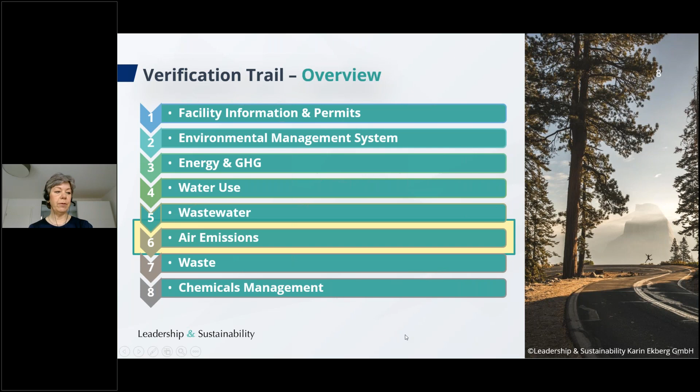And of course, this is about improving performance. We really would like to see that we all have a much smaller environmental footprint moving forward. And finally, these webinars also can help you to prepare for your verification if you are intending to go through a verification. And here is the overview of all sections in the Higg FEM. And you can see we have here the section number 6, air emissions, our topic for today.

Managing air emissions requires a different approach than managing energy, water, and waste. Air emissions are regulated to a set level, while the impact of energy, water, and waste can be continuously improved by reducing quantities. So we differentiate for different types of emissions, and this is important for the entire air emission section to know this differentiation. We have point source or stack emissions. Those are stationary identifiable sources of emissions that release pollutants into the atmosphere. Examples include emissions from boilers and other combustion facilities.

Then we have mobile emissions, emissions from equipment that moves from one location to another. Examples include motor vehicles and construction equipment. And finally, we have the non-point or fugitive emissions, emissions which do not pass through a stack, a chimney, a vent, or other functionally equivalent opening. Common sources of fugitive emissions include screen printing, foil printing, molding, etc. Fugitive emissions could also be the result of construction activities that generate dust or other emissions. These types of emissions are seldom included in the permitting process.

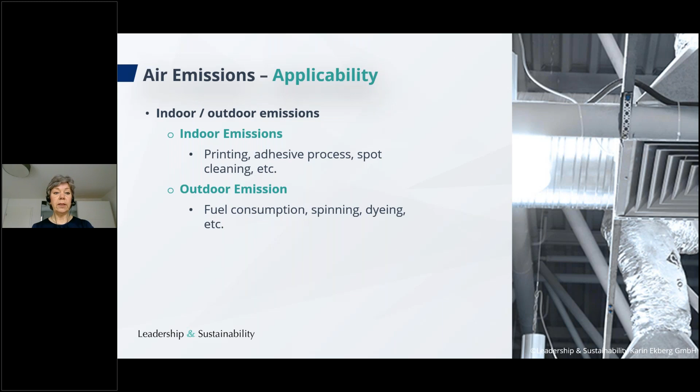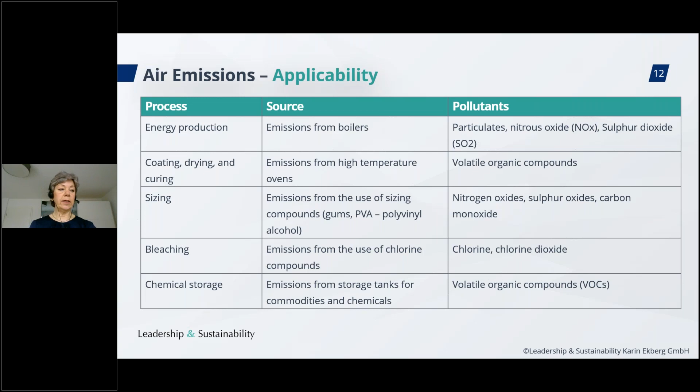And now I want to give you the overview of the different questions in the air emission section. And it looks like this. Oh, sorry. Like this. And so you can see again, at level 1 we have several questions. At level 2, we have only one question. And at level 3, also only one question. So in order to be able to move on to levels 2 and 3, you need to respond to all questions at level 1.

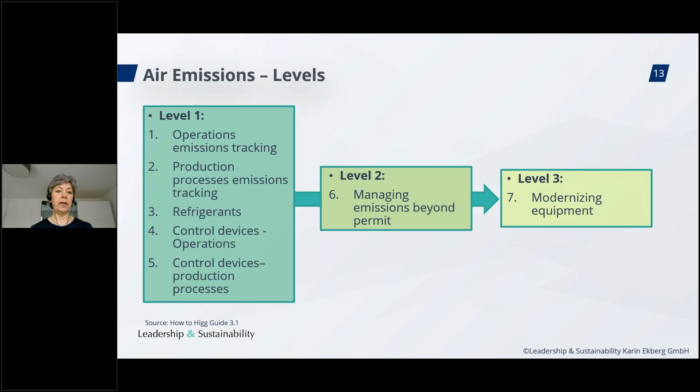And some of them, or all of them, may be included if you have the applicabilities that control all those questions, but depending on the type of air emissions that you have, you may only have a few of those questions at level 1. And let's go to the first question. So this is about the operations and production processes, the Q1 and Q2, the emission tracking.

And here, I just want to give you information about what changes have been made, because in the air emission section, actually quite a lot has changed. There have been difficulties in completing the air emission section previously, because it was very unclear what are operations emissions and what are production processes emissions. And now SAC has sought to differentiate this more clearly. So there are some updated questions. The questions to report all air emissions from operations and production processes have been revised.

And the reporting on quantity of the air emissions, remember you had to fill out how many grams or kilograms of specific pollutants you had been emitting. This question has been removed for now. It will probably be reinserted later again. But this year in the Higg FEM 2020, this question has been removed. And then there is also an updated table to include additional questions on the air pollutant and emission test reports for question 1 and question 2. So those are some updates.

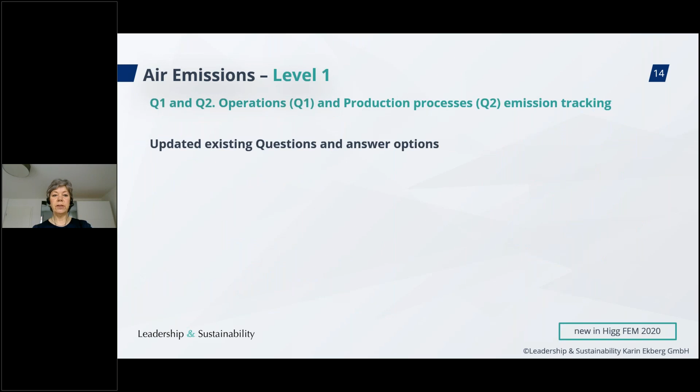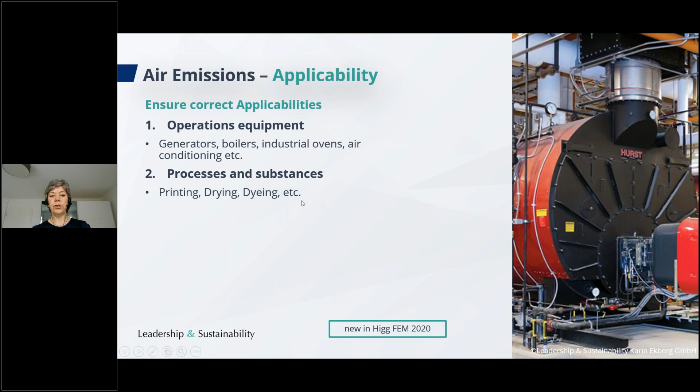So let's go to the first question about operations emission tracking. And the question is, do you track your emissions from operations? And then you should enter data for all your air emissions. So this question focuses on operations emissions. If you remember the emissions you have from operations, let's go back here. Here we can see the operations equipment. Those are generators, boilers, ovens, air conditioning. So question number 1 is about all emissions from your operations equipment. And then question number 2 is about your emissions from processes and substances. So let's go back then.

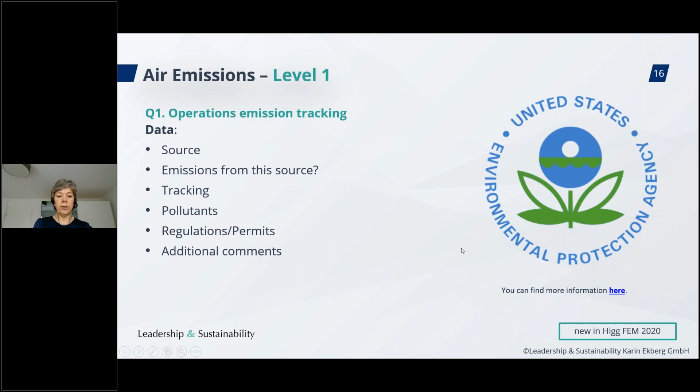So this is question number 1. And here you should report the source, which emissions you have from this source, if you are tracking, which pollutants you have, any regulations and permits that you have, and also any additional comments that you may have. And there is an inventory table available. You can click on this link here, and then you can download this Excel table for you to complete in order to make an inventory.

And similarly to the other sections, water, waste, energy, and actually also chemicals, it is really helpful if you build an inventory so that you are clear on which different emission sources you have and which pollutants you have. As we said, the concentration you don't need this year. And then also if you have any control devices in place, etc. So this is really helpful for you to have. And this is also helpful during the verification, because we see that there is quite a lot of confusion related to air emissions in general.

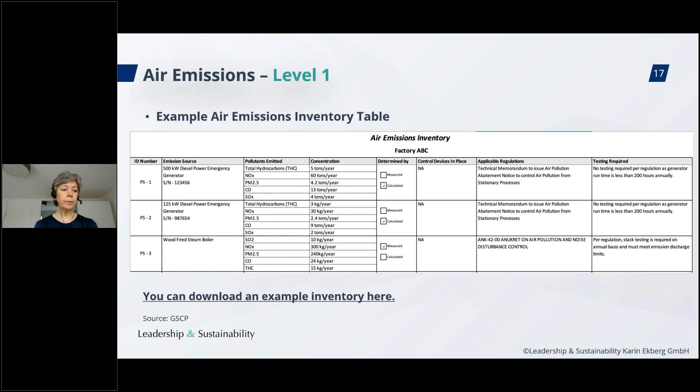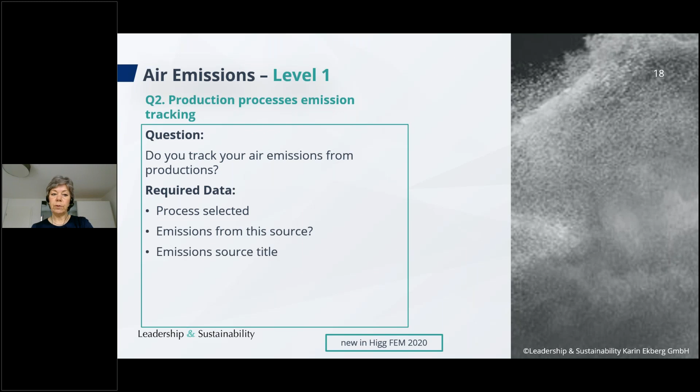And then question number 2 is related to the production processes. So do you track your air emissions from production? And then you should indicate the selected process, which emissions you have, the source title of the emission, the tracking you have, the pollutants, and any regulations or permits that you have. So very similar to question number 1.

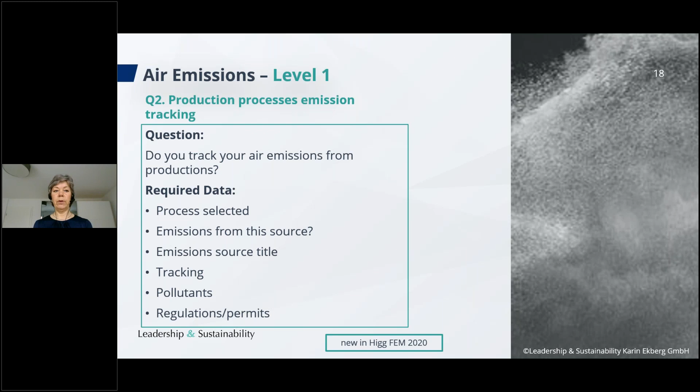And then it is also suggested that you have an inventory, as I just mentioned, and any records or tests that you have made, estimations detailing how the quantity of the emissions were calculated. So that is also important. Obviously, as I said, the question regarding the quantity of the actual pollutants has been removed.

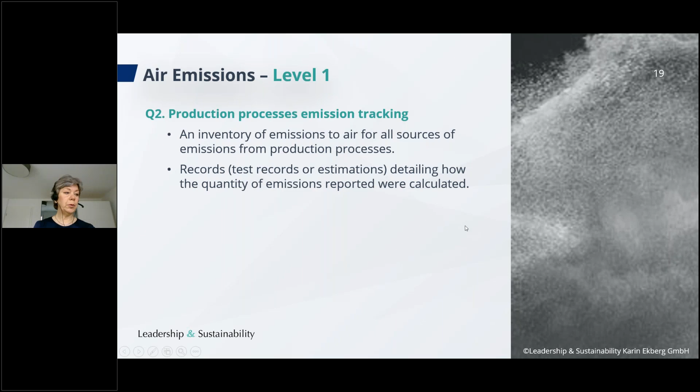And then we have, for question number 2, the production processes and how to calculate and estimate the emissions here. So quite often regarding the production processes, you may need to estimate the emissions you have. And how can you do that? Well, there are different methods for that. So let me go through them. The first one is inventory based, and this is meant potential to emit, PTE.

And by the way, this information in all its detail is included also in the How to Higg. So this is additional guidance that SAC has provided to us now for the Higg FEM 2020. So for this PTE, for this inventory-based calculation, you have your non-point source emissions. They may require a different methodology to determine the amount of pollutants emitted. So note that specific regulatory calculation reporting methodology may be applicable for fugitive sources.

So a potential to emit looks at inventories for all air emissions, including energy generation and process chemistry, to establish the maximum amount that could be emitted from the facility. For example, if you have 1 ton of a specific chemical that was purchased, then 1 ton of that chemical could potentially be emitted to the air. So let's say it's an organic solvent, for example, that actually also emits to air. Of course, there are lots of chemicals that would never end up in the air emissions. But this is generally a very conservative assumption and gives the maximum potential of emissions from a site.

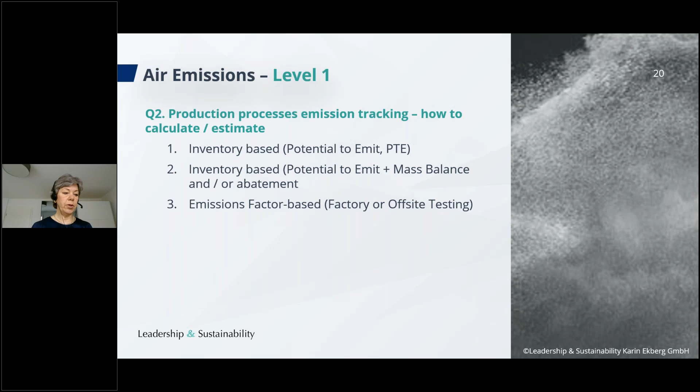These types of testing may be done on-site or off-site by a third party. And please note also that the general recipe and tool must be the same or similar enough to generate the same emissions for this factor to be used. So sometimes for a given facility, hundreds or even thousands of emissions factors are needed to represent their operations, and all testing and documentation must be available to utilize this method.

So this is helpful if you have the same process running several times year by year, and you have once done a measurement and you know that in this case, for example, of the 1 kilogram of the VOC that I'm using, only 0.05 kilogram goes out in the air emissions. And so those are 3 different approaches that you can use to estimate your air emissions without having to do measurements every time.

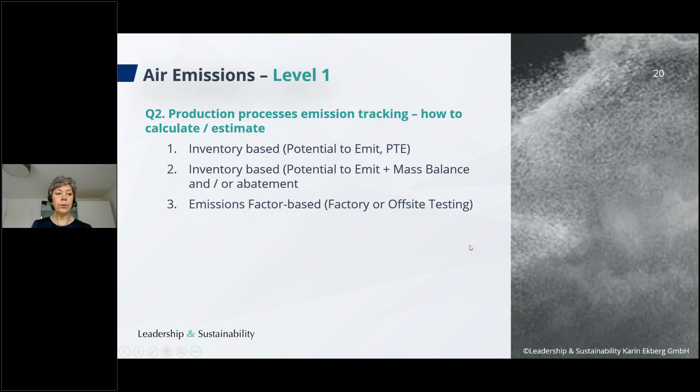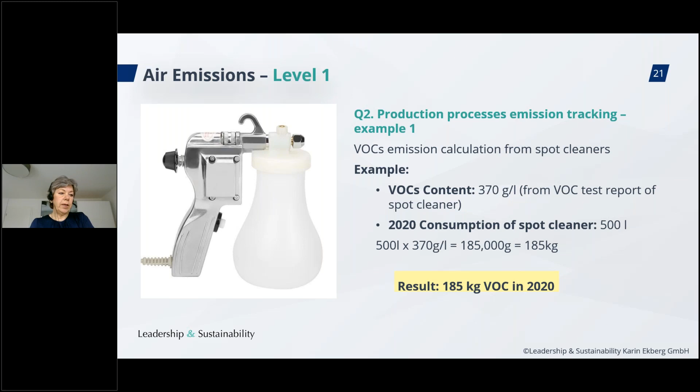So this is also a very simple calculation. Based on the information you have in the data sheet, you should know what the VOC content is, and then if you know how much you use of this, you can estimate the emitted VOC as well. Okay, and we have also one more example, and this is a bit different because we will be looking at if we already know the concentration.

And in this case, we have a factory that operates 300 days in 2020, and the VOC concentration is 0.5 milligram, and the particulate matter is also 0.5 milligram. We know the airflow, and it is 30,000 cubic meter per day. And then we should calculate the facility's particulate matter and VOC's fugitive emissions in the total.

And we have then 0.5 for VOC, 0.5 milligram per cubic meter per day, and times 300 days a year times 30,000 cubic meter per day, and then that gives us 4,500,000 milligram per year, which equals 4.5 kilogram in 2020.

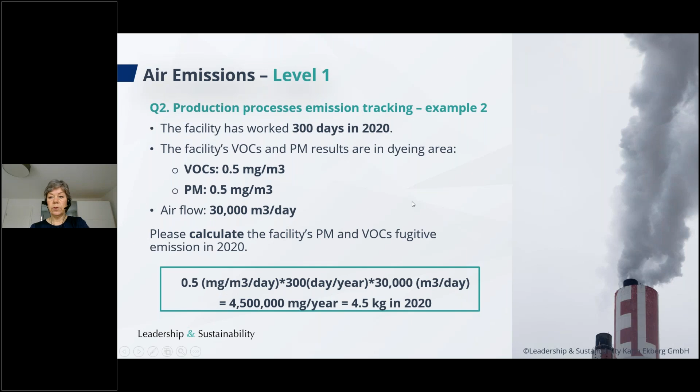And you can actually calculate this the other way around as well. If you would like to know the concentration you might have in a room where you are using VOCs or PM, you can use this formula in the reversed order in order to calculate the concentrations, if that is what you would like to do. So those were just two calculation examples, and you see this is just a very simple engineering approach to do these calculations. All right, so this question was 1 and 2.

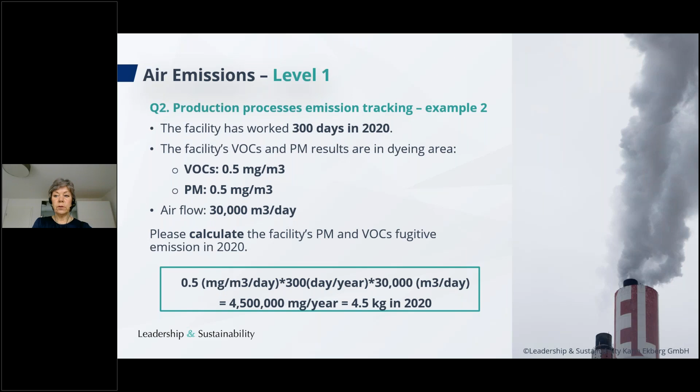And now let's move on to question number 3 and refrigerants. The question here is, did your facility add additional refrigerants to any existing equipment during this reporting year? And why do we have this question here? Well, because we want to know that we don't lose refrigerants anywhere. And so obviously, if you have to add refrigerants to any device, then you know that you have a leak somewhere and you need to fix that.

So if you respond yes to this question, you will be asked which refrigerants, and you will be adding them one by one. Then the quantity of the refrigerant added, the unit of measure, the tracking method, and also your plan for fixing the leak. So this is information that you would need to give for each and every refrigerant that you have been adding.

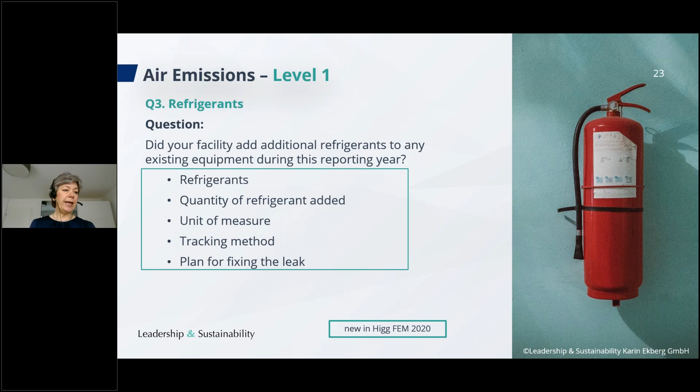And then there is additional guidance regarding the data management. And you will remember this is very similar guidance to what we have already heard about in the energy and water sections. So please review the source data against the aggregated totals to ensure that it is accurate. Please also ensure that the most recent and updated versions of data tracking spreadsheets are being used and that all calculations and formulas are correct.

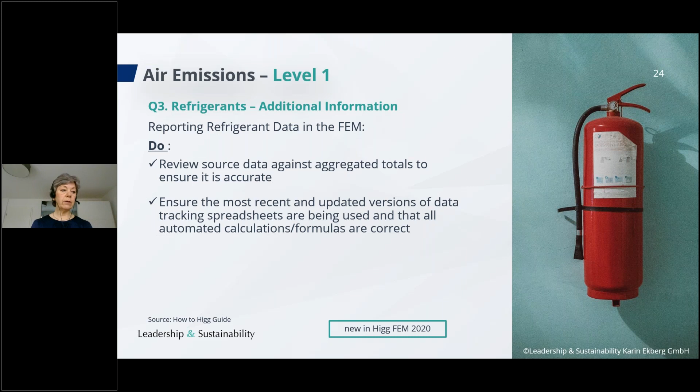Please ensure that the proper units are reported and verify any unit conversions from source data to reported data, and review any assumption or estimation methodology to ensure accuracy. So the data management in the Higg FEM is so important, and there is a lot of additional guidance in the Higg FEM 2020 related to the data management.

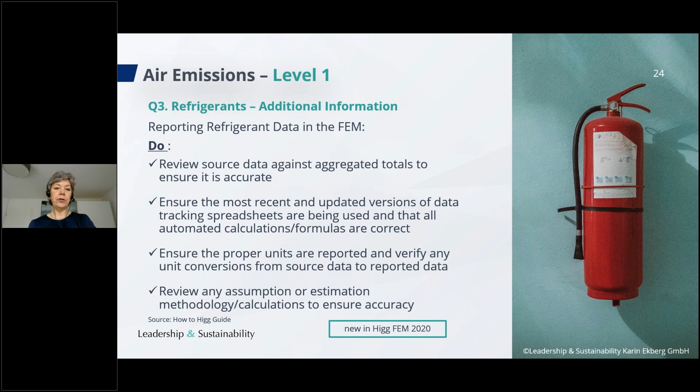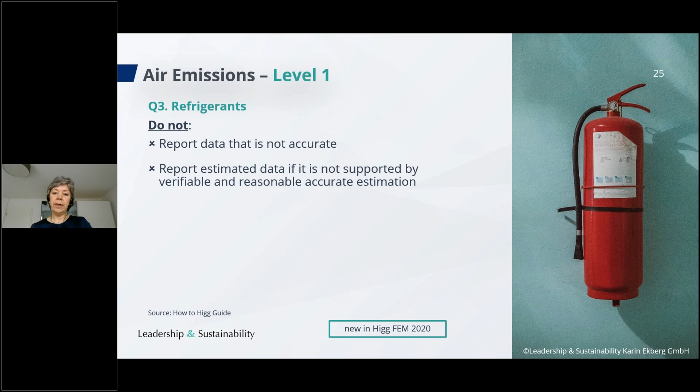And you should not report data that is not accurate. You should not report estimated data if it's not supported by verifiable and reasonably accurate estimation. It is allowed to do estimations, but you should be able to explain how you have done that estimation and which calculations you have done.

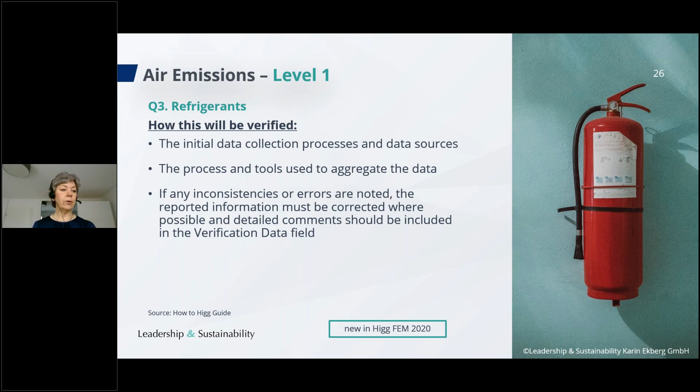And as a verifier, we have also additional guidance here. We should check the initial data collection processes and data sources, the process and tools used to aggregate the data. And of course, if there are any inconsistencies or errors, we should report that as well and make a comment correspondingly. So this was the question about refrigerants, and now let's go to the control devices questions.

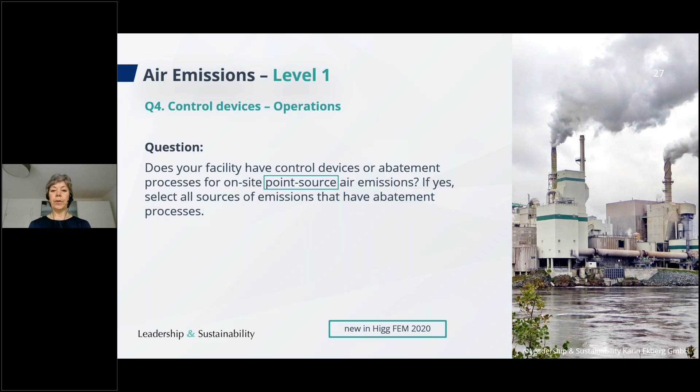And now again, we need to differentiate between operations and production processes. And now this question 4 is about the control devices you have in your operations, so for boilers and the other operational equipment. The question here is, does your facility have control devices or abatement processes for on-site point source air emissions? And if yes, select all sources of emissions that have abatement processes.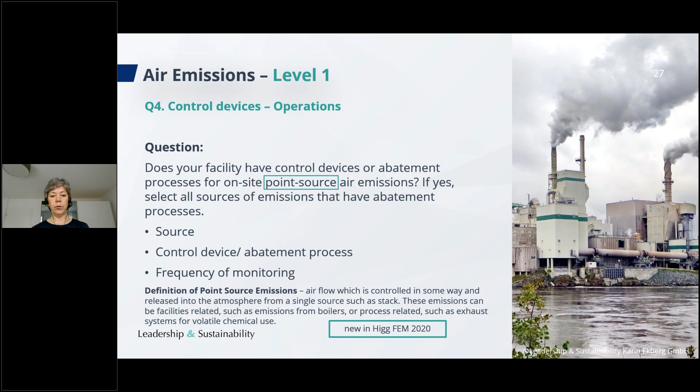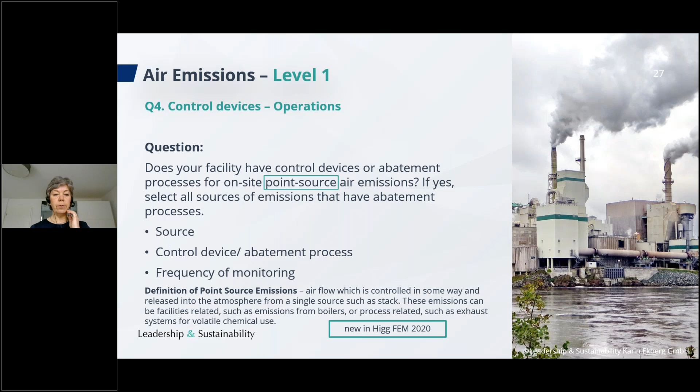And you should indicate the source, and that is actually pre-populated, and then the control device, abatement process, the frequency of the monitoring, and then down here in the small font you see the definition of point source emissions. So this is airflow, which is controlled in some way and released into the atmosphere from a single source, such as a stack. So boilers, for example.

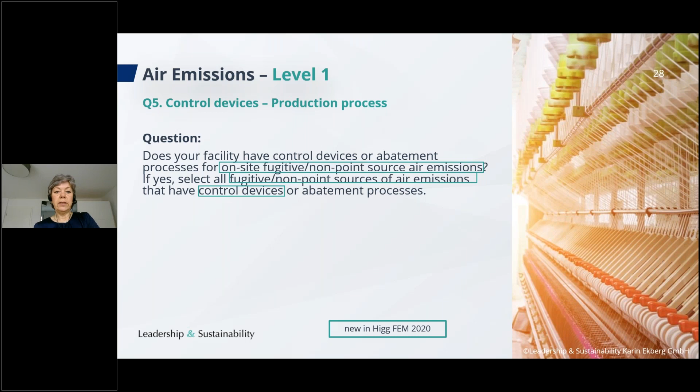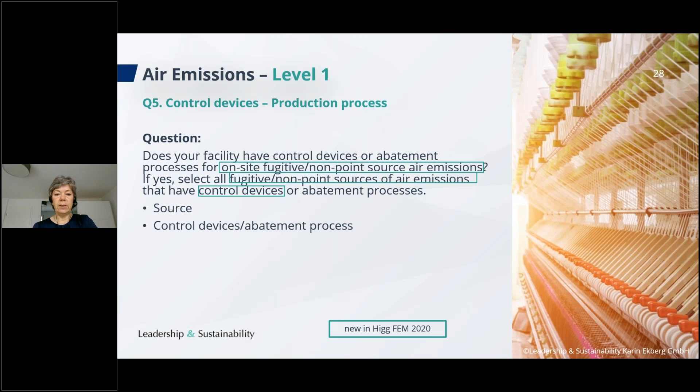And then the next question, number 5, is the same question, but now for production processes. Does your facility have control devices or abatement processes for on-site fugitive or non-point source air emissions? And if yes, select all fugitive non-point sources of air emissions that have control devices or abatement processes. And we have similar questions here again: the source, the control devices, abatement process, and the frequency of monitoring. And here we have the definition of non-point source or fugitive emissions.

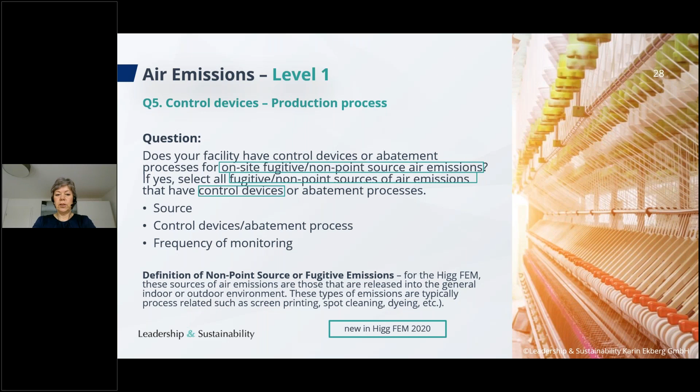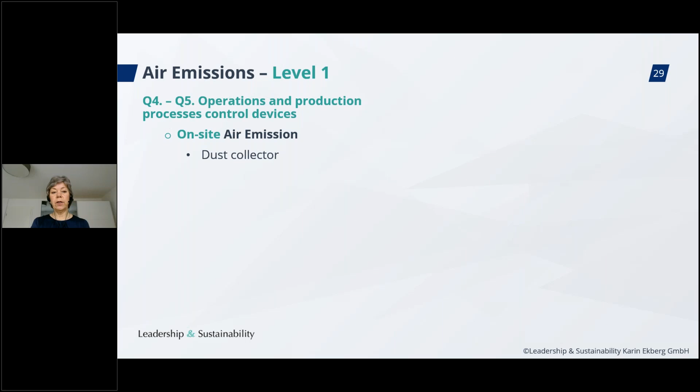And related to those two questions, just a few examples of control devices that you may have. So for example, you may have a dust collector, a bag filter, wet scrubbers, a fume hood for indoor air quality or solvent recovery, or perhaps a local exhaust ventilation of some sort.

And here you can see a bag filter, a dust collector. It may be a bag filter actually, and how that would work. So you have from the manufacturing process, and you have the collector, you have a fan, and you have a stack, and it goes out as an emission here. And in this case, this is a point source emission, so an on-site air emission.

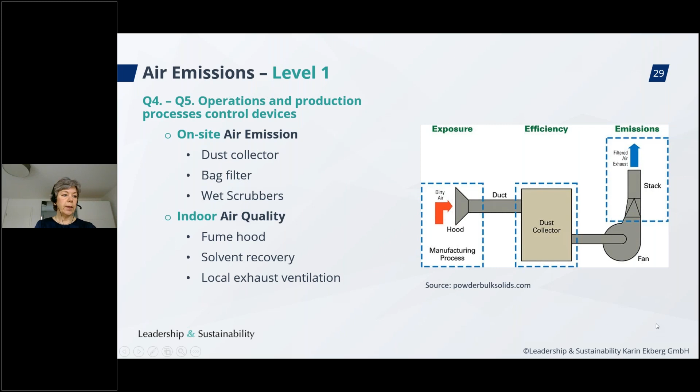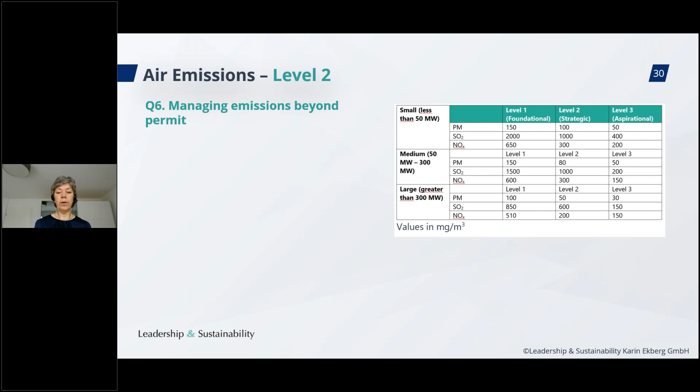And then question number 6, and now we are already at level 2, so all the previous questions, question 1 to question 5, they were at level 1. And now we are at level 2 with question 6, managing emissions beyond permit. And the question is, has your facility gone beyond permit requirements to achieve a higher level of air performance in nitrogen oxides, sulfur oxides, and particulate matters?

And here you may either have made a change of boiler, perhaps a change of your fuel, so that you have better emission values. But it may also be that you have not done a specific change. Perhaps you were already using a much better fuel. And then, of course, you should have a look at this question as well. So even if there was no specific action, perhaps from the beginning you had a very good source of energy.

And then if we look here into this table, if you have said yes to this question, you will then get a follow-up question, which is which level did you reach? And you can see here level 1, level 2, or level 3. Level 3 is the very best one. And then you can see the different values for particulate matters, SO2 and NOx, for a small boiler, medium boiler and a large boiler. And let's say we have a small boiler. Wait a second, I think I have an example later on.

But anyway, how it works is that you check your values. So if you have done measurements, you would know which concentrations you have in your outlet, in your air emissions. And then you take those values and you identify where you are. So for example, with particulate matters, perhaps you are at 50 here at level 3, or lower than 50. With SO2, let's say you are here at level 2. And with NOx, you are at level 1.

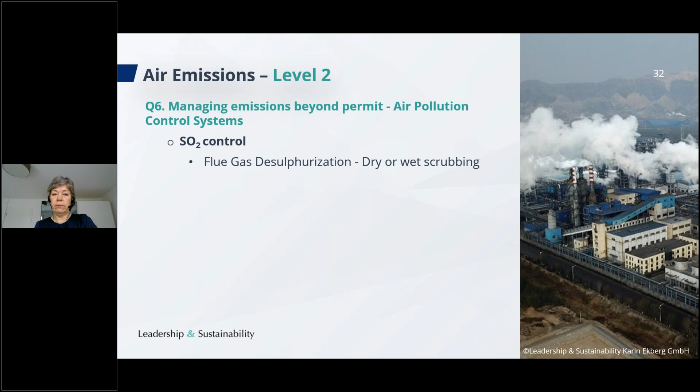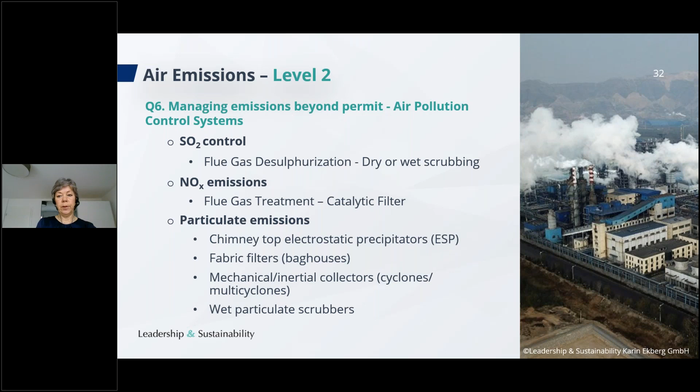For SO2 control, you can use flue gas desulfurization, dry or wet scrubbing. For NOx, you can use, for example, a catalytic filter. For particulate emissions, you can use an electrostatic precipitator, fabric filters like a bag filter, cyclones, multicyclones, and there are also wet scrubbers that you can use for particulate emissions. So those are just a few examples of the different control systems or devices that you can install in order to improve your air emission concentrations.

And here now we have one example. The facility's emission results are particulate matter 75, which means that they are in between level 2 and level 3, so they have reached level 2. SO2, 1200 milligram. This means that they have actually reached level 1. They haven't really reached level 2. And NOx 250, that means that they have reached level 2, but they haven't reached level 3.

And then in this case, the response is that they have reached level 1, because they are not at this level. They have a higher value than 1000 for SO2, which means that they then fall back with their entire emissions to level 1, the foundational level.

So that's how it goes. You always have to take basically the lowest level that you get. So if one of your emissions are at level 1, then you have level 1. If one of your emissions are at level 2, but all the others at level 3, then you are at level 2.

And now the last question here, question number 7, is about modernized equipment. Do you have a process for implementing modernized equipment to reduce or eliminate air emissions and indoor air quality issues at your facility? So the previous question was if you have made any improvements.

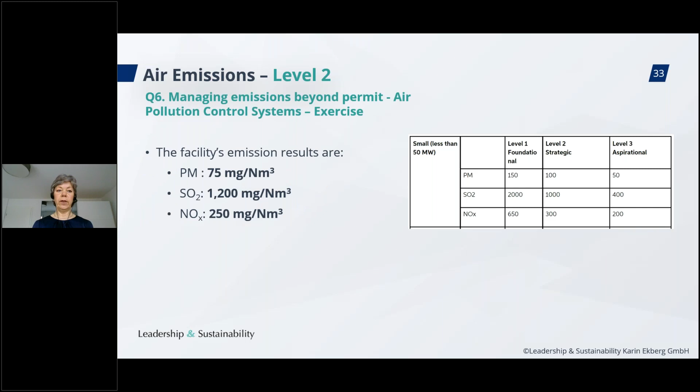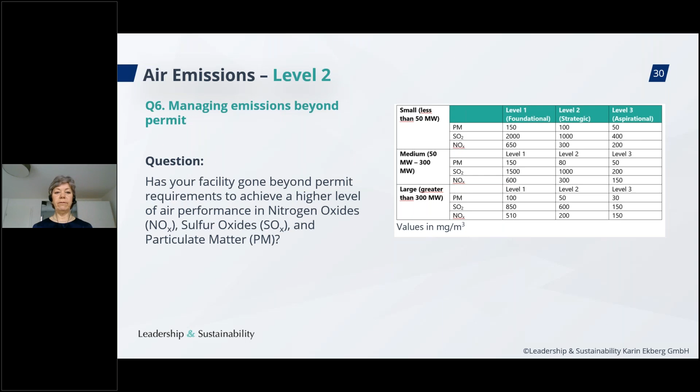Let us just go to that question so we can see it here. So this question number 6 was, have you gone beyond permit requirements? And now question 7 is actually building on that by asking if you have a system or a process for implementing modernized equipment. So this is an ongoing process that you have to continuously check, improve, and implement.

And here the intent for the facility is to be able to share or demonstrate advanced practices to control air pollutants. And the suggested upload is the documentation of plans and processes for equipment upgrades, or documentation of recent upgrades. And those recent upgrades must be from the reporting year.

So if you have made upgrades, for example, in 2019 or 2018 or even earlier, you cannot list them here. Only upgrades that you did in 2020. And then, of course, your process for moving forward and making sure that you can implement modernized equipment.

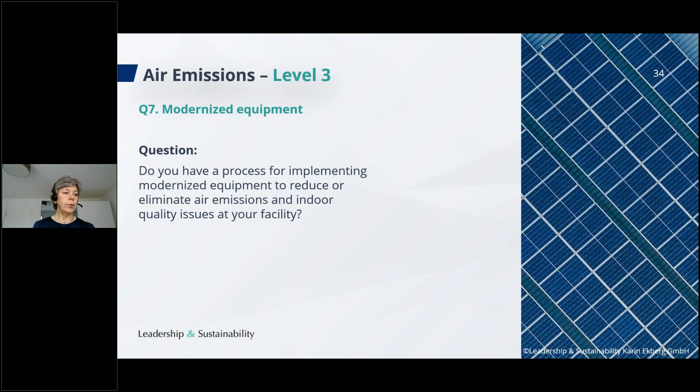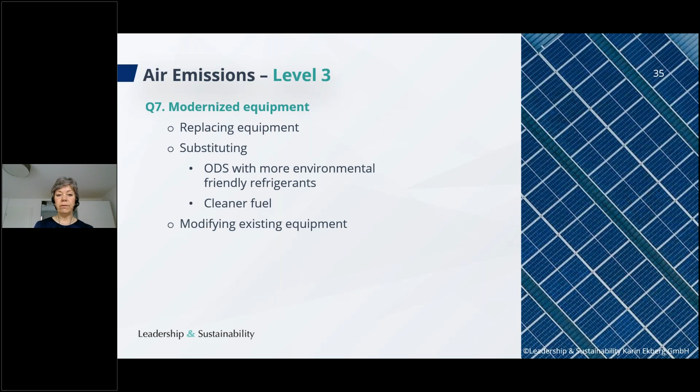So that is that, and here are some examples. Replacing the equipment, as we looked at previously, substituting ODS with more environmentally friendly refrigerants, cleaner fuel, modifying existing equipment, optimizing abatement equipment, and generally reducing emissions.

So this was actually all the questions in the air emission section. And I hope that you find the air emission section now a bit clearer, related to operations emissions and production process emissions. And let us go and also have a look online.

So we are now here in the air emission section. Remember, we have the applicability questions first. So we are asked which operations equipment we have. Again, operations equipment related to operations emissions. Do we have a boiler? We have responded no. A generator, engines, no.

Ovens, no. Heating and ventilation, refrigerant, air conditioning, other sources of known air emissions, other sources of volatile organic compounds, yarn spinning, finishes, etc. But I will actually go up here again and select also that we have boilers, a small boiler, and that we have also generators. So we see a lot of good examples down here.

And then the processes, so this is also clear now. You can see here the questions. First, the question was about operations equipment, and now we have the question about the processes that we have on site.

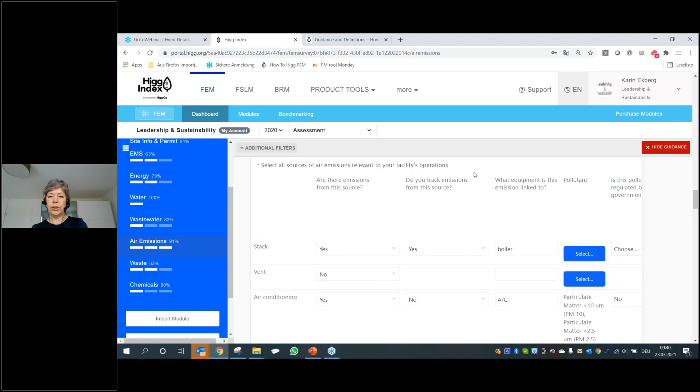And now question 2, we have our production emissions. And here, similarly, we had selected printing, dyeing, spot cleaners, and we get the same questions here as previously. So this is now very clearly differentiated. And then we have question number 3 about additional refrigerants.

If I say no here, that I don't add any additional refrigerants, then I don't get a follow-up question. I can go directly to question number 4. If I respond yes, then my next question is, do you track refrigerant use emissions?

And I say yes here, and then I should list all of them. So in this case, I have selected R20, 5 kilograms, it was measured. And yeah, here I have a plan, in another language, but my plan to fix the leak—that is important that you add.

Then the question is, do you want to report another added refrigerant? You can go on as long as you want. If you have 10 different refrigerants that you have added, you should be adding all of them. In this case, we only have one added here.

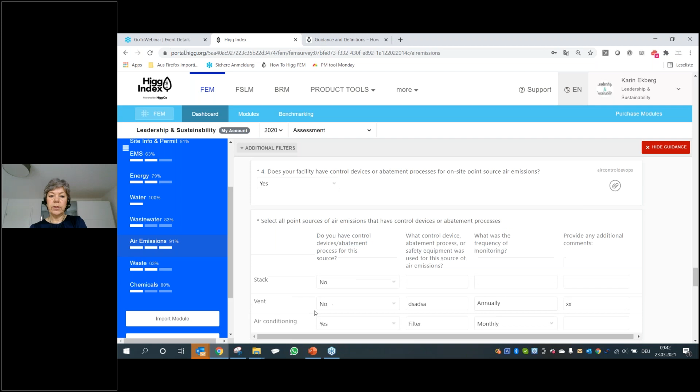The next question is, does your facility have control devices or abatement processes for on-site point source air emissions? We say no here, and for air conditioning, yes, for example, and you can then complete this table. There are not so many questions here: what control device, what was the frequency of monitoring, and any additional comments.

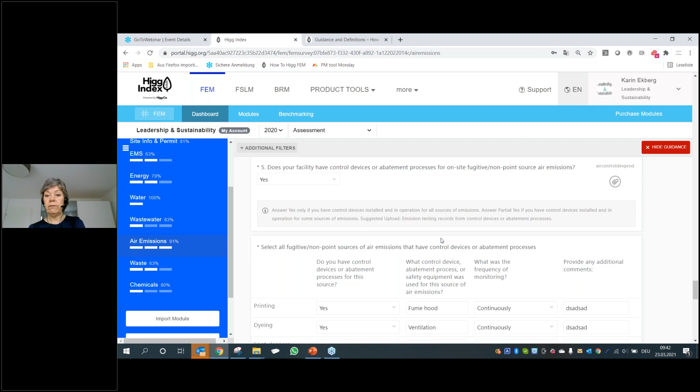Then the same question, but now for on-site fugitive non-point source air emissions. We had already indicated that we have printing, dyeing, and spot cleaners, so we get that table pre-populated. Always in those tables, you get it pre-populated depending on your responses to the applicability questions.

Now we can go on to level 3. In this case, we have said that we have reached aspirational, for example. And then the last question: do you have a process for implementing modernized equipment to reduce or eliminate air emissions and indoor air quality issues at your facility? So that was the demo, and let me now go back to the presentation.

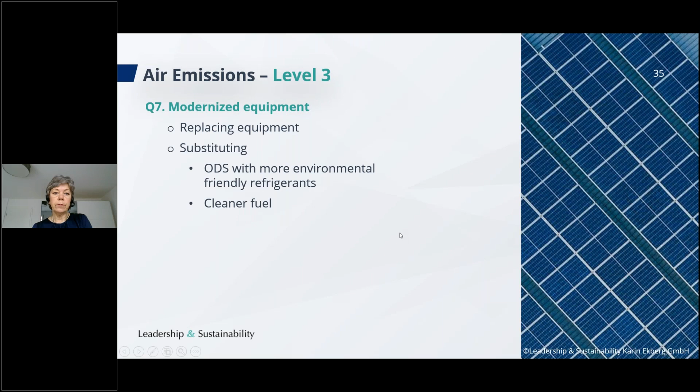And we have come to our question time. So let me have a look. I believe we have questions here.

What is the difference for this section from the greenhouse gas in energy section? Do this only for fugitive emissions? Yes, so the greenhouse gas question in the energy section is only about the greenhouse gas emissions that you have. For example, the carbon dioxide that you have—most of it will probably be due to carbon dioxide, but you may have others as well that contribute to the carbon dioxide equivalents you have due to the different energy sources you are using. If you have had a leakage of refrigerants, they will automatically also be added to your greenhouse gas calculation, to your carbon dioxide automatic calculation. So that is the difference. Here we are talking about all other air emissions as well, not only greenhouse gas emissions, so they are not specifically asked for here in this section.

Is there any testing frequency for air emissions? Yes, it may be that through your local permit it is specified how often you need to test and measure your air emissions, so you need to check that. But SAC and Higg FEM does not specify that.